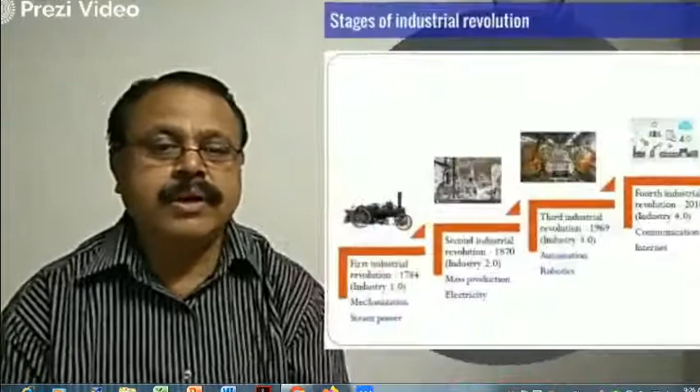So let's start with the definition of automation. Before we look into the definition, there are different stages of the industrial revolution. The first focused on mechanization. The second was mass production using electricity. The third was the development of NC and CNC machines. Right now we are using the internet, robotics and automation for manufacturing. In this way, automation has moved from NC and CNC machines to its present status.

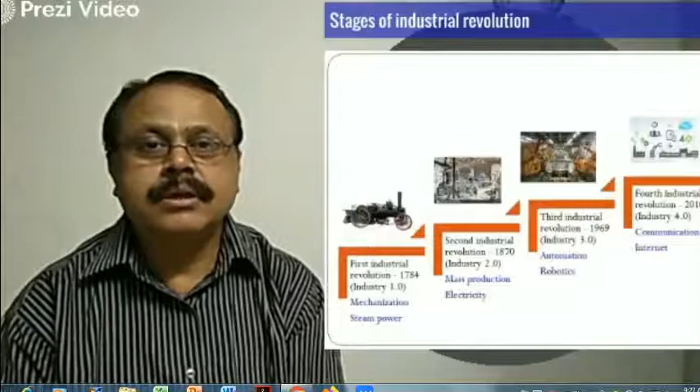Automation is a technology concerned with the application of mechanical, electronic and computer-based systems to operate and control manufacturing activities. It may be a process activity, a material handling activity, or an inspection activity. This definition is related to the manufacturing sector.

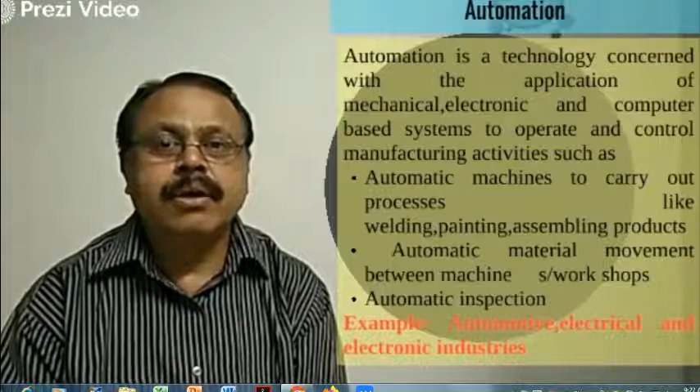Let's try to understand what we mean by automation and mechanization. Mechanization is the beginning of automation. Initially, human beings wanted to replace their efforts with machines. It means the muscle power of the human being is replaced with the help of machines. Whatever operations required muscle power were replaced by mechanization. Whereas automation is related to human work where the thinking process is involved.

Take the example of an ATM. Once we enter the amount to be drawn, it collects notes of different denominations, makes a bunch of them and gives it. So here some human thinking and decision making is involved. If that sort of thing is automated, we call it automation, not mechanization. Mechanization is only where the human effort is replaced with machines.

Why do we go for automation? There are several reasons, which I have listed here. Cost is one, because by automation we can reduce cost, we can decrease labor work, we can maintain good quality, and we can have a reduction in lead times.

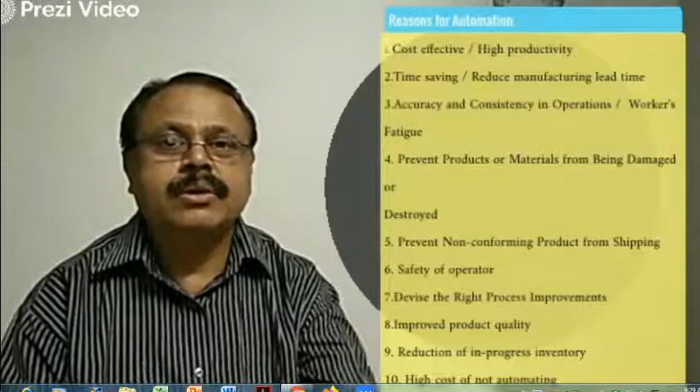Let's have a look at the different types of automation. There are basically three types: fixed automation, programmable automation, and flexible automation. Fixed automation is very helpful for mass production. It means if the production quantity is large, we can make use of specialized machines.

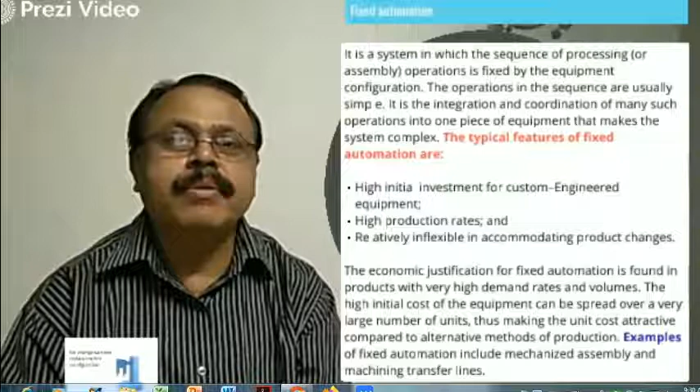There will be a somewhat high initial investment in these special types of machines. But when it comes to operating cost, it will be very minimal. The only disadvantage with fixed automation is that for any change in the product or in the configuration, we need to make a total physical change.

Suppose that I have made a machine with two drilling machines to drill the two holes. If I want to make it three, I have to change the physical configuration. This is the limitation of fixed automation.

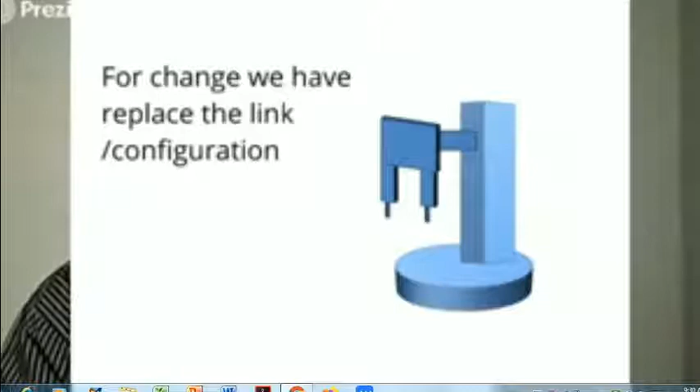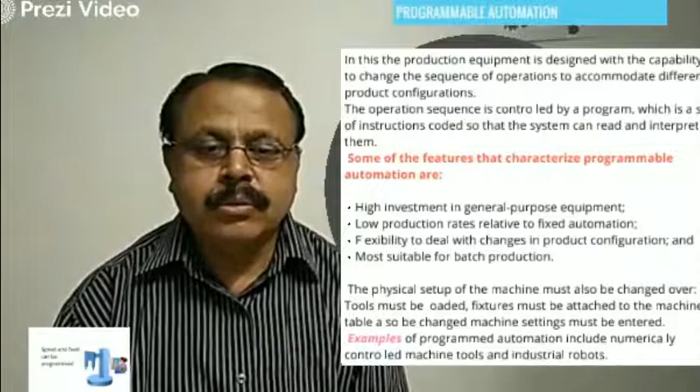Programmable automation is the one where we can do the different processes by changing the program of instructions. This is very useful for products which are manufactured in batches. The big advantage is that if you want to change any type of process, it can be done very easily. Let's look at how this can be done.

Here we have got a machine where I can change the speed and I can program it as per my requirement. According to that, the different operations or the inspection activities will be carried out.

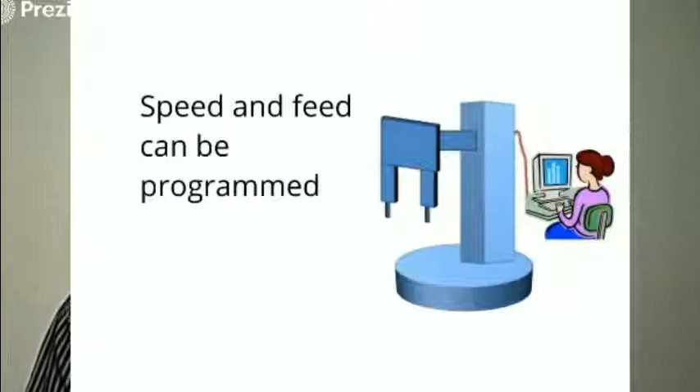Next is what we call flexible automation. Flexible automation is the one where we have flexibility to change the product without stopping the manufacturing. It means we have flexibility in changing the machines and in changing the operations. Any product we can manufacture at any given point of time.

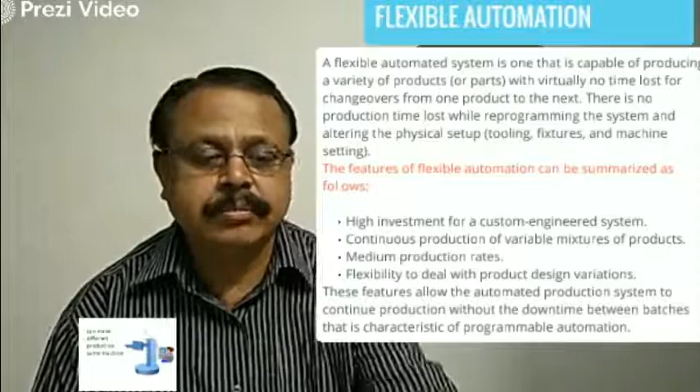The only point is that high investment is required because we have to go for machines which are quite general in nature, and they should have all the capabilities. Not only the machines, even the material handling systems are supposed to be very flexible in nature. So different products I can manufacture with the same machine. If that is there, then I call it flexible manufacturing.

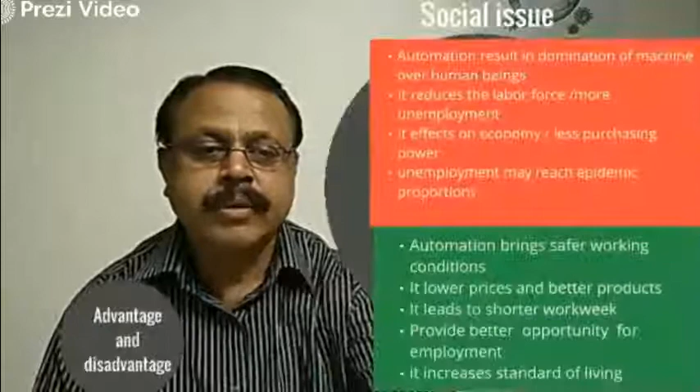Social issues. When we talk about automation, the biggest social issue we face is unemployment. It reduces the labor force, so it reflects on the economy. Recently we might have seen that the earlier BPO centers were replaced with IVR services. That has led to unemployment.

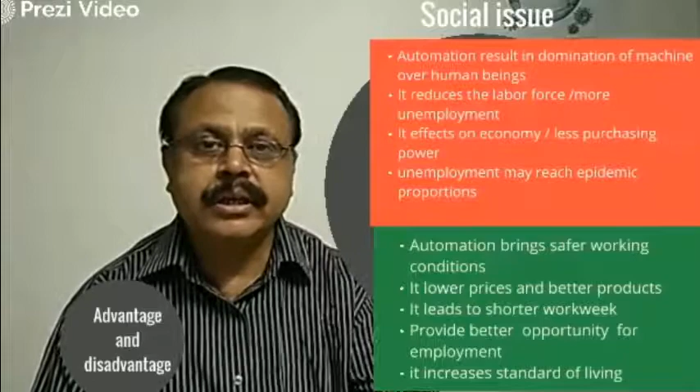Certain advantages we also have on society. Automation gives you safer working conditions, lower prices, better products, shorter working times, provides more opportunity for people to grow, and in simple terms, it increases the standard of living. So these are certain issues related with automation.

Advantages and disadvantages. We already know there are many advantages. We can get high production and better quality, we can utilize the resources very effectively, and there is worker safety. Again, the disadvantage of automation is related with unemployment.

Because of unemployment, people may migrate from one place to another. If this unemployment is not addressed at an early stage, it is possible that it may reach epidemic levels. With proper training of the people and proper social awareness, definitely we can deal with these issues.

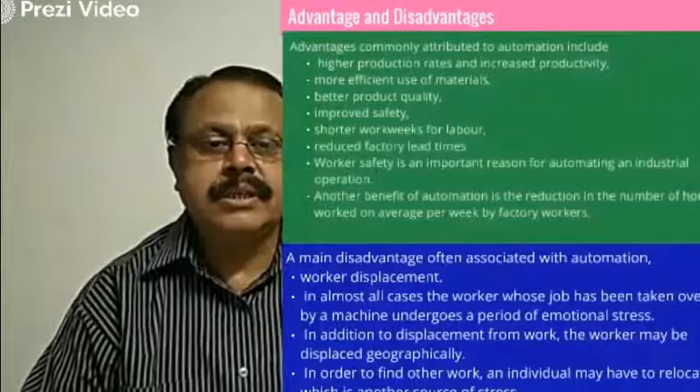Now the challenges we are facing during the implementation of automation. At present there are lots of challenges. There is inconsistency in demand. Automation still is to be implemented everywhere, and there is still a lack of core robotics in manufacturing. There are a lot of changing trends, which is another challenge in implementing automation.

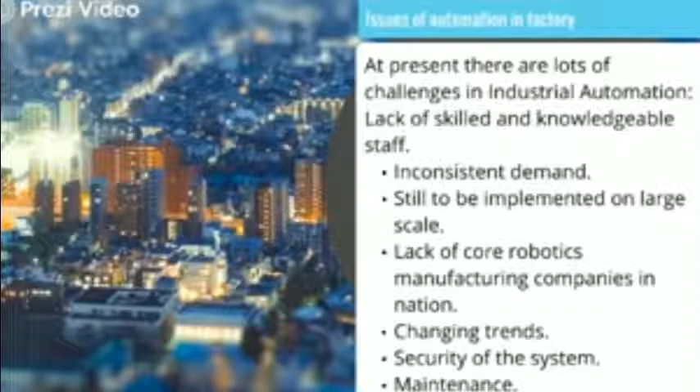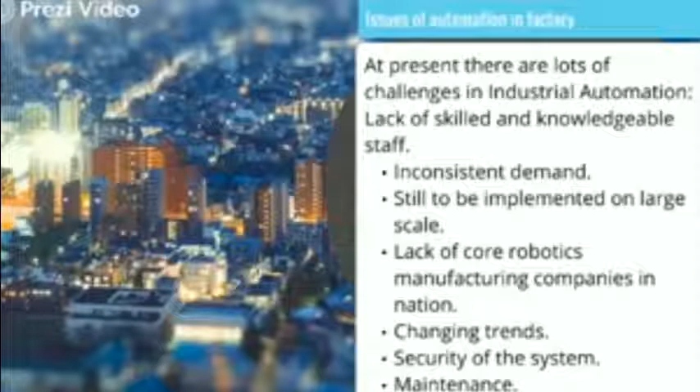Changing trends are there, and security, because everything is automated and nowadays we are using the internet for that. Security is becoming a big problem, and so is maintenance throughout. There should be a continuous supply of electricity and internet. Everything is connected and automated. If anything small goes wrong, it hampers the total system.

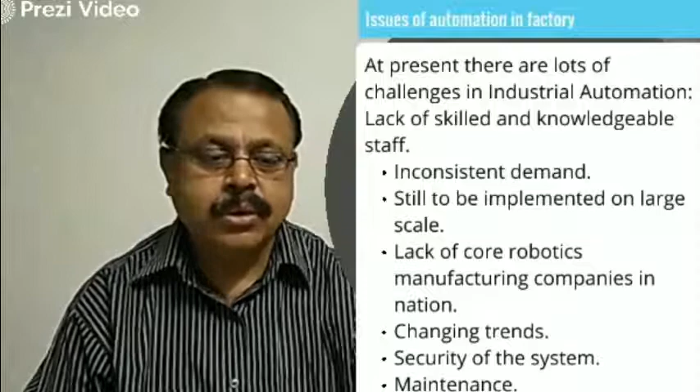So this is all about automation. I hope you got an idea about what we mean by automation, the different types of automation, the impact of automation on society, and the advantages and